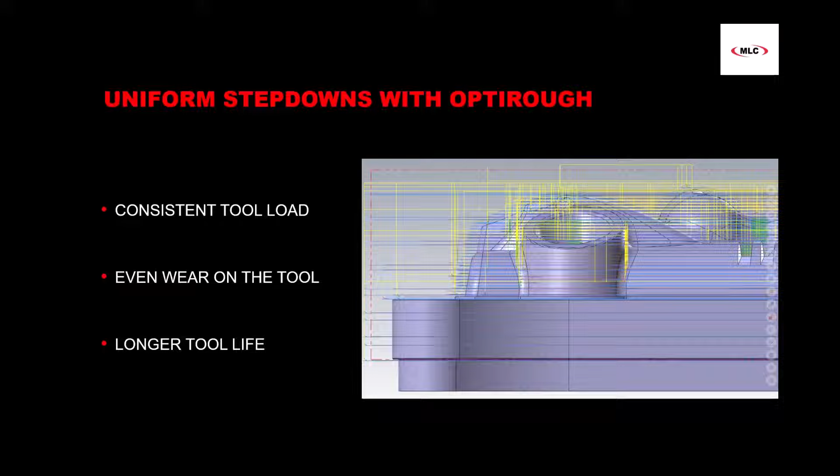So number 1 is uniform step downs, and that's pertaining to the Optirough toolpath. If you've used Optirough in the past, it's a great toolpath. It's taking the dynamic toolpathing that dynamic milling in 2D uses and kicking it up a notch into a three-dimensional environment, roughing out a lot of material efficiently and effectively with step downs and then incremental step ups, right? How could Optirough get any better? Well, it just did. One of those things you might have had to work around and play with back and forth in your parameters window is those step downs.

So we look at our cut parameters, and for step down amount, I have 125%. That's about 781 thousandths. And that value comes from the top of part. If we look at this model here as an example, that's the top of the part. And that's going to be each individual step down, 1, 2, 3, 4, 5, 6, and so on, and each equals that amount exactly. Not a problem, right? We've calculated how much of the flute length we want to cut with. Problem is when we get to that very last step down, what happens with whatever's left over?

Notice that height is a lot shorter than the previous step downs. That's just the way Mastercam's calculating, from the very top of the material you define to the maximum bottom you're trying to cut, giving you a 781 thousandths step down depth, and then you're left over with whatever. You could be left over with 25 or 50. And when you're looking at toolpaths like this, it'd be hard to tell that you only have a 25 thou cut left over at the very end, right?

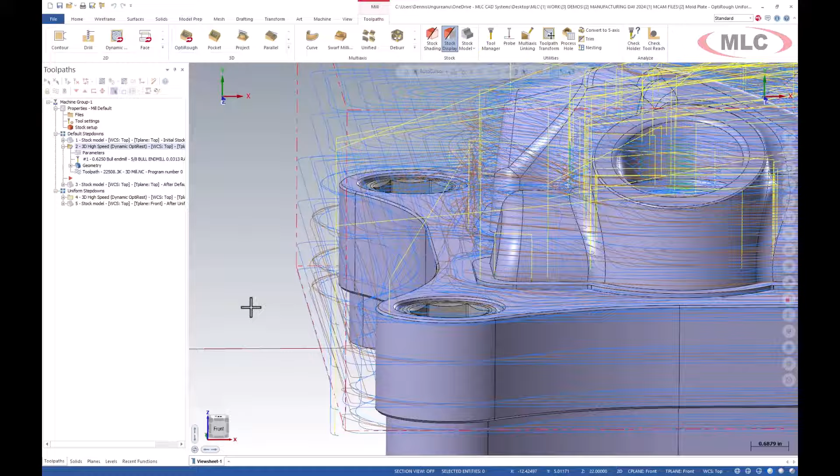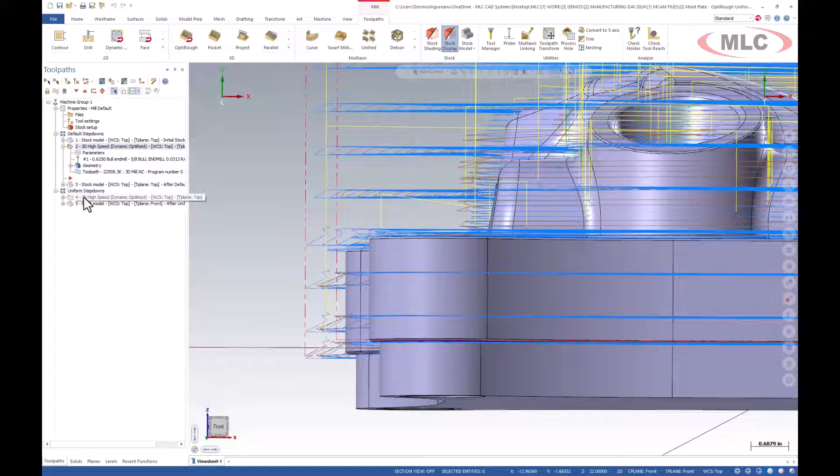You could easily absorb that if you changed that value and spread it among all the other step downs, right? So you go in and maybe do some math and say, well, the number of step downs I have is this much, and the height I've set is this. Okay, I'm going to decrease that a little bit. All right, there you go. But we keep having to go back into parameters to do that. Not anymore. Make it easy. Let's go to the new option here, and it's as simple as a checkbox.

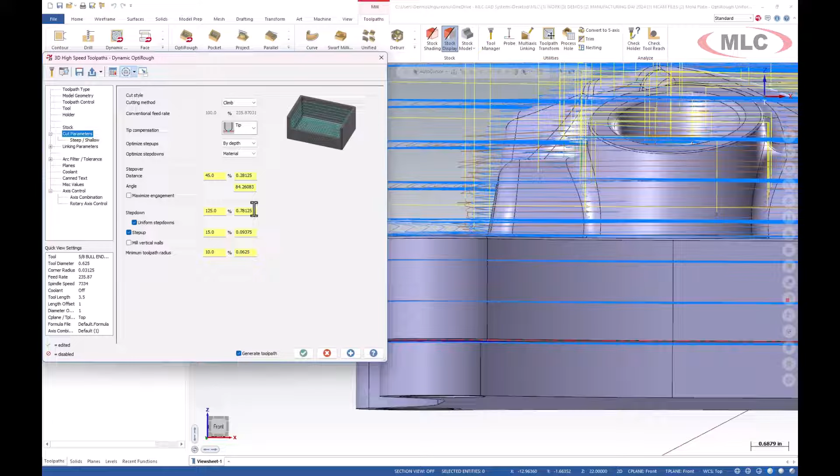So we look at our tool and we determine that 781 is about the max that I want to step down and engage with my flute length on that type of tool, maybe based on material and all that. Well, when you check this box, it essentially takes this amount and turns it into more of a max step down, a max step to cut.

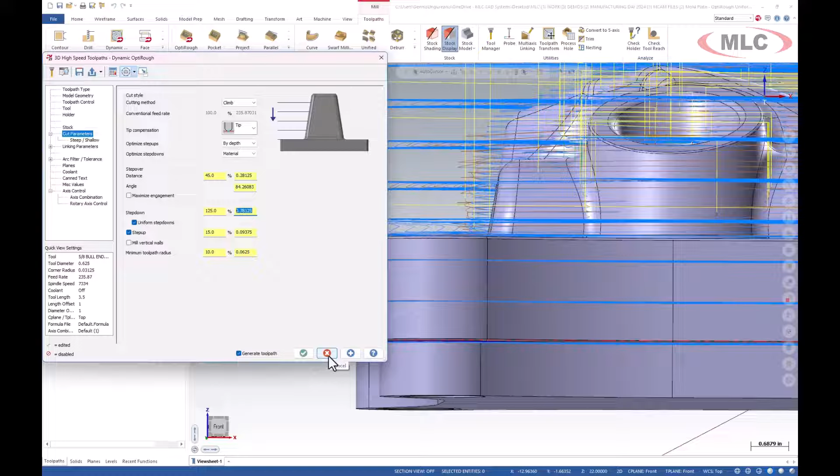And what it'll do is it'll distribute the rest evenly from start to the very maximum bottom. So we'll go back to that same view that we had before and notice that last step down is equal to the previous step downs. Hence the word uniform step downs. Now that amount isn't 781. It's probably maybe 740, 750, could be somewhere in between.

Does it really matter exactly? Well, if it matters, then don't turn it on. But it doesn't matter to me. I'd rather have consistency on all my depths, and that way my flute length is wearing out evenly, and that way my tool is lasting longer.

That way when I'm hearing the hum of that tool running and removing material, because we machine with our ears. That's one guy that taught me that, is that we machine with our ears. And when we hear that same consistent hum, then we know everything is all right.

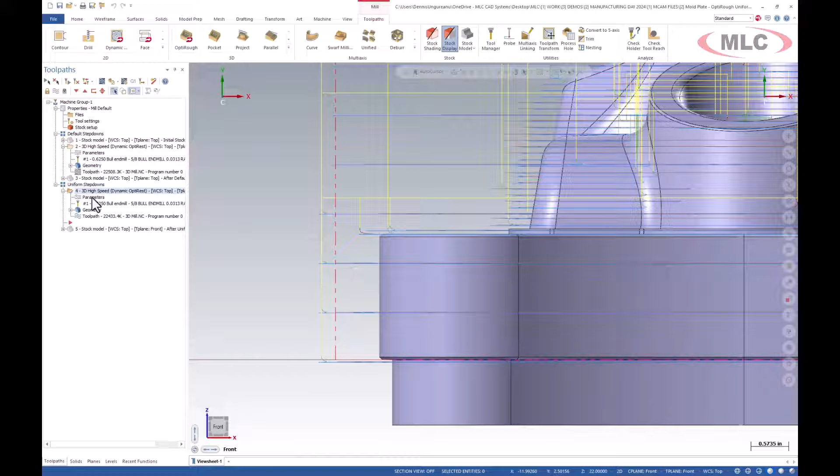So speaking of that last maximum depth, right? We could change that as well, right? And you could mess with your step downs. But what is that maximum depth? What is that final depth at? Well, that drives us into number 2.

And the second thing that I'm going to show you for 2025 is one of the new things that they've improved on, so you can visually recognize what your heights are coming from your top of stock to your final depth and even clearance positions, right?

If you remember in 2024, one of the new things in all the drilling and hole making toolpaths were those colored planes. Now those colored planes were neat because you could quickly identify where your clearance plane is, where your retract plane goes, where your feed plane starts, where your top of stock is set, where your final depth is, and then if you're drilling, where your tip compensation is if you're drilling through the part.

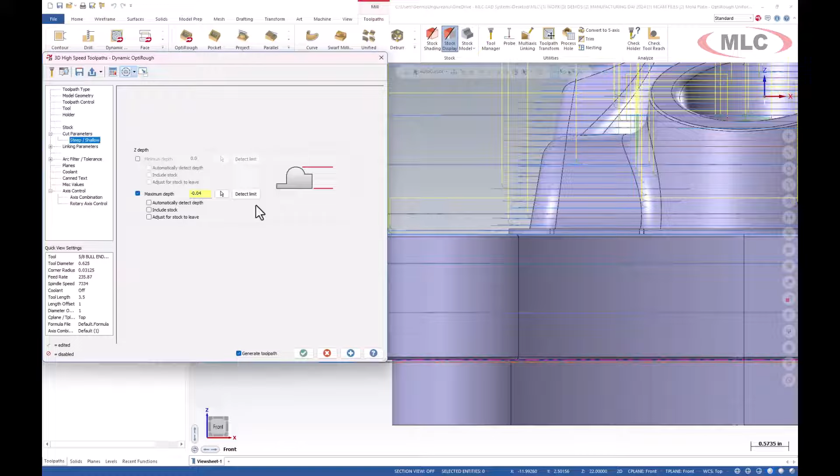So it was quick and easy seeing those little graphical visual planes in different colors. And now they've introduced that into the milling toolpaths. Notice how I rotate my part, and since I'm on this page here, there's my maximum depth. So I'm looking at this value saying 40 thousandths of what?

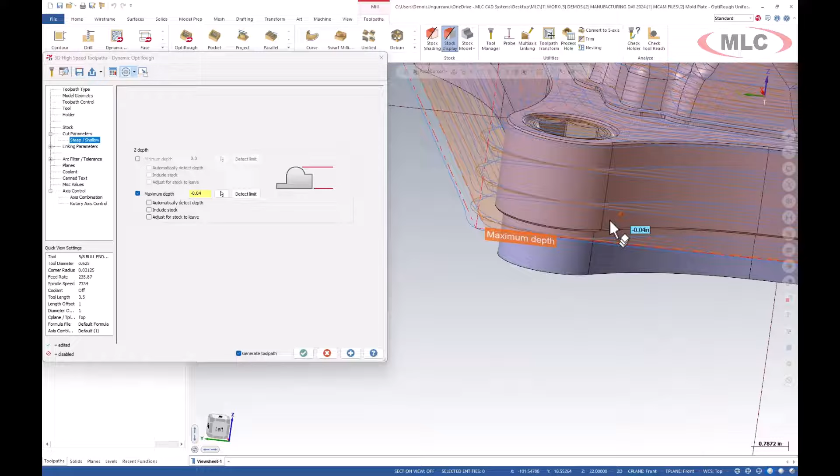Well, I can see -0.04 from the bottom of the part, not the bottom of the fixture. Or this is not the bottom of my part. This is the top of the flat surface that gets bolted onto. So that's one quick visual representation, and we can work with other things, right? Like, for example, this is interactive.

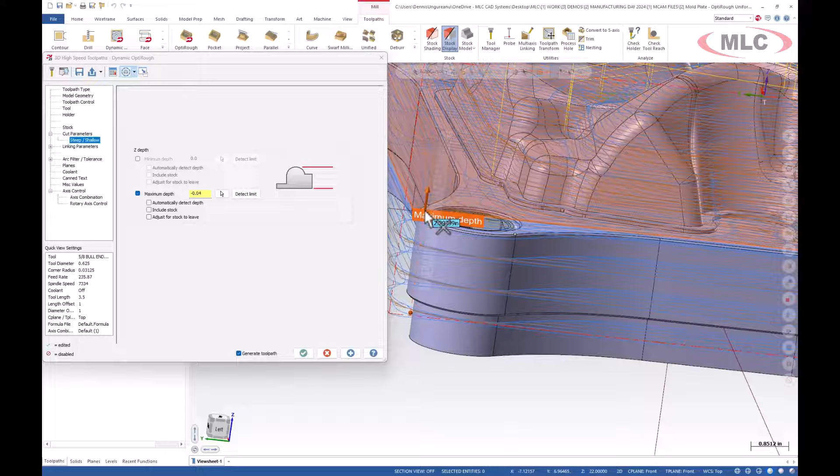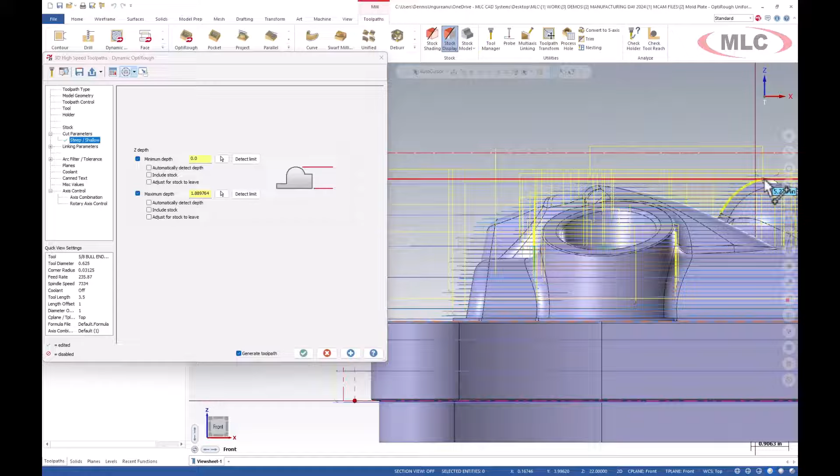I can take this just like in the drilling ones and move it. So if I want my maximum depth to be the top of that surface, I can change that. Changes the value. I can click and it'll snap to certain points. I can go to minimum depth. I can do the same thing. I can see, well, my top of stock is here, and that's going to be right to the top of that surface. I can quickly see the start and finish depths for this part.

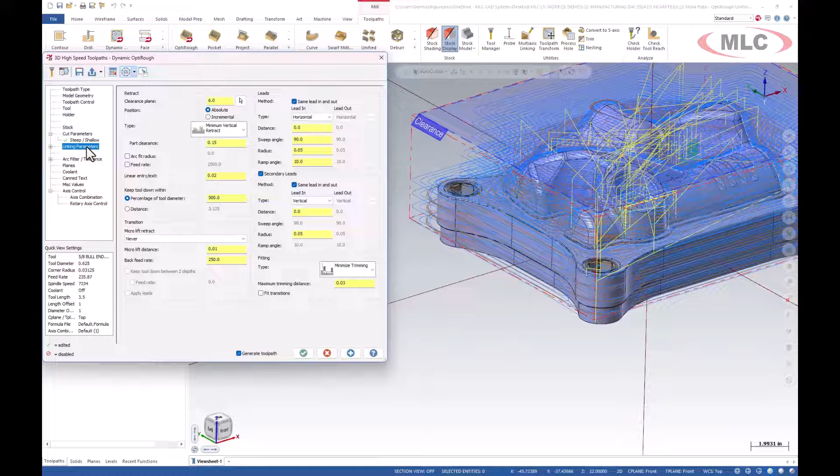And then the most important one, which I think is one of the most important, is your clearance plane, right? That's your rapid. That's where your tool, if anything's going to crash, it's going to crash at that high speed. And we don't want that. That's the worst thing for anything to happen, right? So we can visually see where our clearance plane is set.

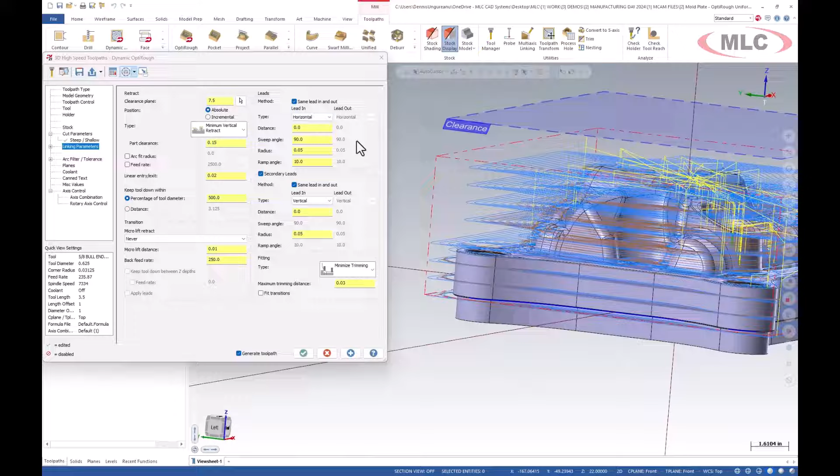And I can bump that up a little bit. If I'm not feeling that confident or comfortable, no problem. I can move it, and I could also just set a number. Let's say we'll go 7.5 inches. Look at that. We got plenty of clearance from our top of stock. And those are the new visual enhancements or graphical visual planes in the milling toolpaths.

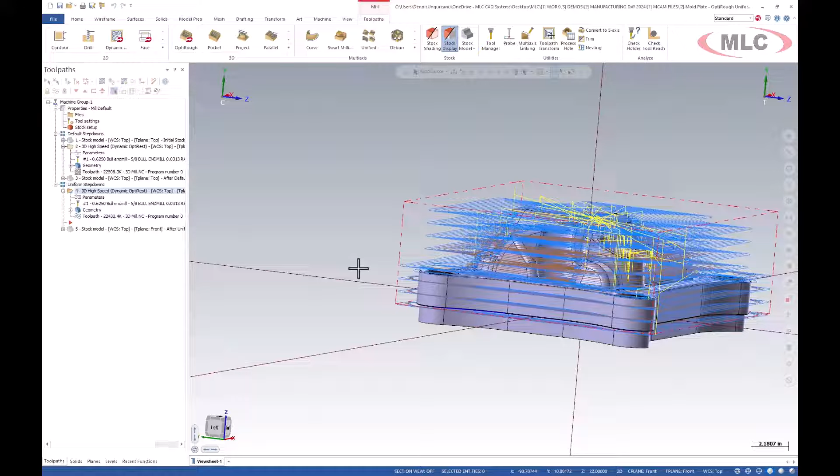And the benefit comes when you're working with other planes or kind of multi-axis, and you're doing the top of your part, front, side of your part, then definitely those planes come in handy to visually see if you've got your clearances set right from wherever your work offset is set, right?

Okay. Number 3 is going to be something that's a little bit combined. All right. And that's going to be a hole recognition improvement to the solid models with auto feature detection, with improved automation on the process holes toolpath.

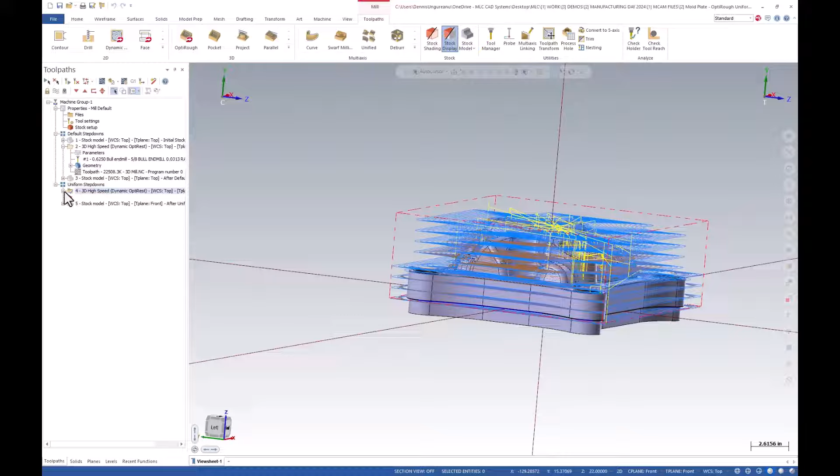If you haven't seen that or heard of that, we'll dive into that as well, which basically gets us faster hole programming by creating and setting up templates of your processes and then just recalling those processes to redo the same holes you do probably thousands and thousands of times per year. So let's jump into Mastercam and take a look at what I'm talking about.

If you're familiar with 2023 and you go back to 2023, what they did is they took this model. Let's say they added a feature called find holes. So under model prep, they added this feature called find holes, right? And you could bring in a model like this that's got all these different solid features, like a counter bore for an M12 socket head bolt with a 1/2 inch through hole.

But what height is that counter bore? What diameter is that counter bore? What else? What other holes are there? What are those sizes? Right? So you could say find holes, and it will find all those sizes out for you. It'll figure it out.

A lot of times with these models, when they're brought in as an STP or parasolid, they won't have that feature history of how it was built. So whatever CAD system you're using, a lot of times it just comes in as a solid body, right? And it doesn't know that this hole is this size or counterbore and all that.

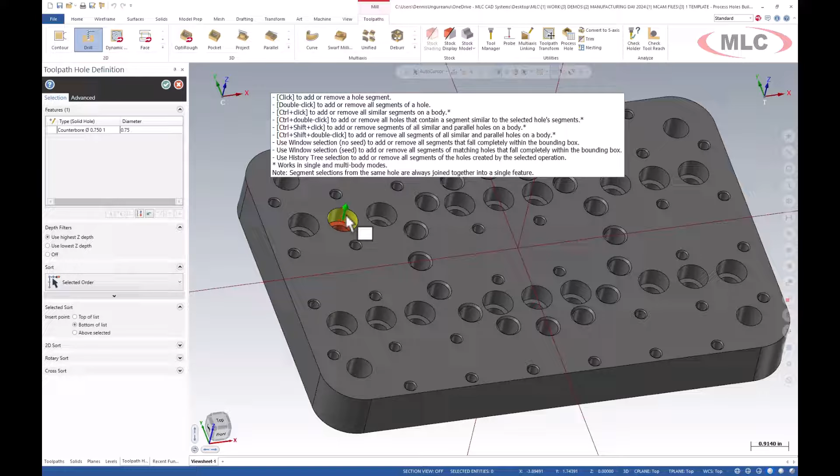Now you can just select any type of hole here, and notice that it'll extract that information. And when I go to my hole segments, it's pulled that information. Now it's all automatic, right? It's part of that auto feature recognition with models that don't have that history built in.

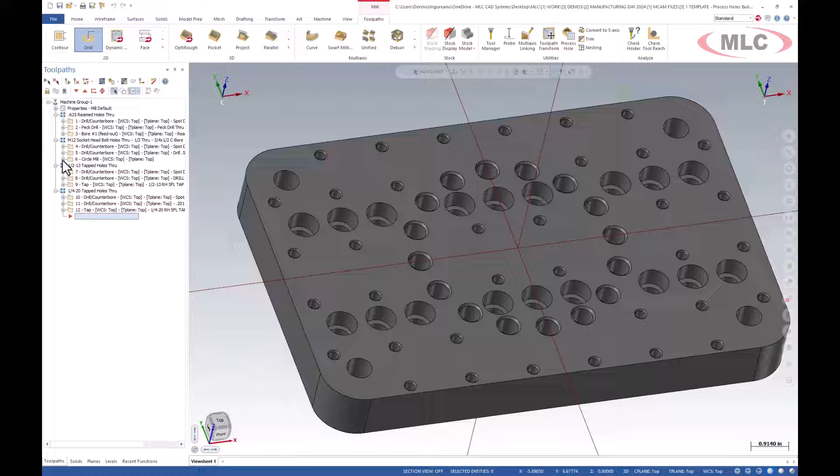So speaking of these toolpaths, I had to do 12 toolpaths for 4 different types of holes. Now, if I have another plate and my boss says, well, you got another plate to do here, it's got a little bit different pattern and it's got the same holes or whatever. Well, I got to go back and reprogram all those 12 toolpaths. Now, I ain't going to do that. I don't know about you, but I'm not going to go back and reprogram those. Not the way I did the first time.

What I'm going to do is export all my toolpaths, import all my toolpaths, and retouch all my geometry. And then you got to go to all your depths and check your depths and make sure those are good. If that's your way of doing it, or you've created a little more of a shortcut to do that, that's great. That saves you from spending, let's say it took me an hour to an hour and a half the first time around, to about 30 minutes.

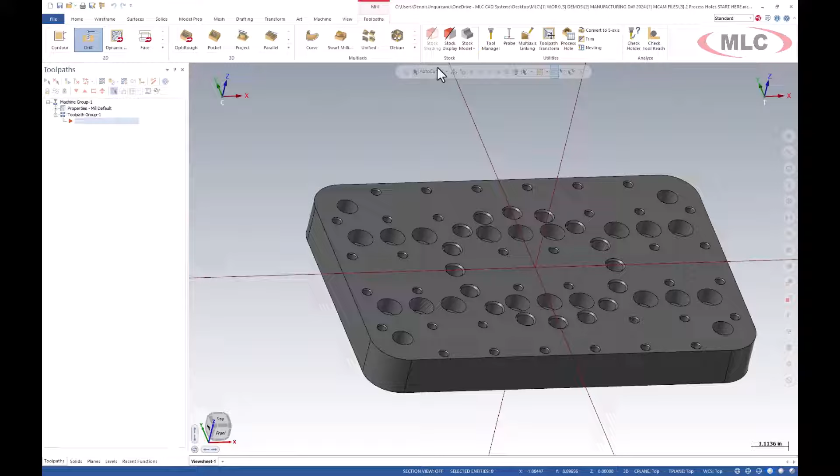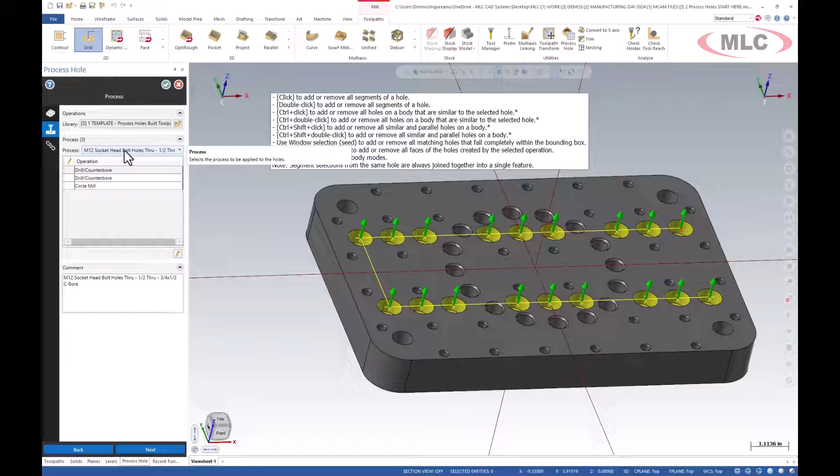Not with Process Hole. If I've created that process and I saved that template file and named it, right? I can now select this counter bore, and I'll select all those holes because I'm holding Control Shift, and just pick out that template file. And what it does is, notice that grouped name that I was telling you about. Well, it figured out based on the geometry that that's my M12 socket head bolt process. And I hit OK. I just finished programming all those holes.

And I can just continue until I'm done with my entire part and reprogrammed it all in a matter of seconds. 30 seconds, if that. It's that fast. And it still gives us the flexibility of changing things around. Because you might say, well, Dennis, I want to change my half 13 process because I don't have that tool, or I want to use a roll form tap instead, or I want a thread mill. That's fine. No problem. We can change things up.

Just highlight all your processes, right click, and say explode process hole. And it splits up all those 12 toolpaths into individual toolpaths like you had originally in your template. I can right click and collapse, and there's all my 12 toolpaths. We can take it another step further and right click and say, let's sort by tool. Now we've sorted by tool, and we created a more optimized and efficient program, not having to do multiple tool changes back and forth, right?

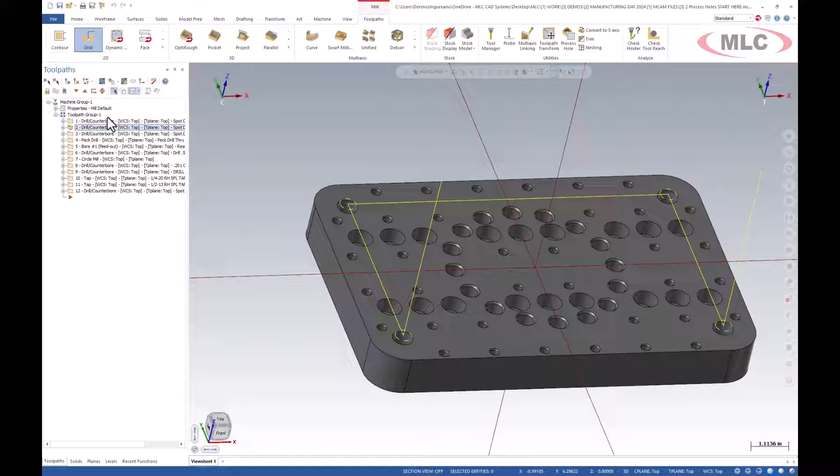And I can go back and change my spot drill. I can select whatever changes I decided to make on the fly. I can go back and change those tools, which would probably be a roll tap size and your drill size for that roll tap, right? The powerful automation of Process Hole will save you tons of time and money, and it'll save you from repeating these processes back and forth. But you gotta have that prep work, right?

Just like the chef in the kitchen doesn't show up at 5 o'clock right when dinner opens and start prepping those ingredients, right? He shows up hours in advance, probably early in the morning, to shop for fresh ingredients and then go back into the kitchen hours before to prep them for dinner time. So that's what we're doing here. You got to prep by creating those templates, and you don't have to use a part. You could use any model as long as your geometry is identical in size and type for what you typically do. So that's pretty neat. I think those are very nice time-saving improvements to 2025. I'm super excited about that one.

And number 4 is probably something you've asked for many times, and you're finally getting it in 2025, which is to create a finish toolpath within 2D dynamic milling and area milling as well. Now you might ask, why would I want to do that? Well, whether you're familiar with dynamic milling or not, if you use it, you get these little vertical lines along the wall. And it's not always the best finish, right? You machine this part with a really nice finish, and then you get these little vertical scallops all along the wall. It's just because of that dynamic motion with that arc entry and exit.

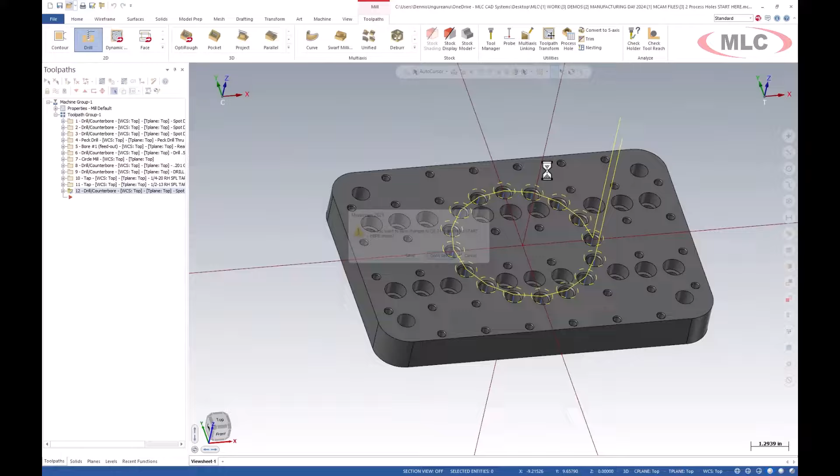There's one guy who called me about 2-3 months ago, and he goes, "Hey Dennis, I'm using that dynamic toolpath, and is there a way to go back and rerun the walls? Because it leaves these little vertical lines along it. It doesn't look that great." And I said, "Well, sir, if you would have called me about 2 to 3 months later, the answer would be yes. But at this time, the answer is no." That's because in 2024 they didn't have it, but now in 2025 they do.

So he was also coming back to me and saying, man, I'm just trying to find a lazy way of doing it, to be honest. And I'm like, hey, you know what? I get it. We're always trying to find the lazy ways to do things with Mastercam, right? We're always trying to find less clicks and ways to go through less dialog boxes and just get straight to the outcome that we want quicker and faster, right? Being more efficient. So I totally get it. We can all be lazy in that aspect and benefit from it.

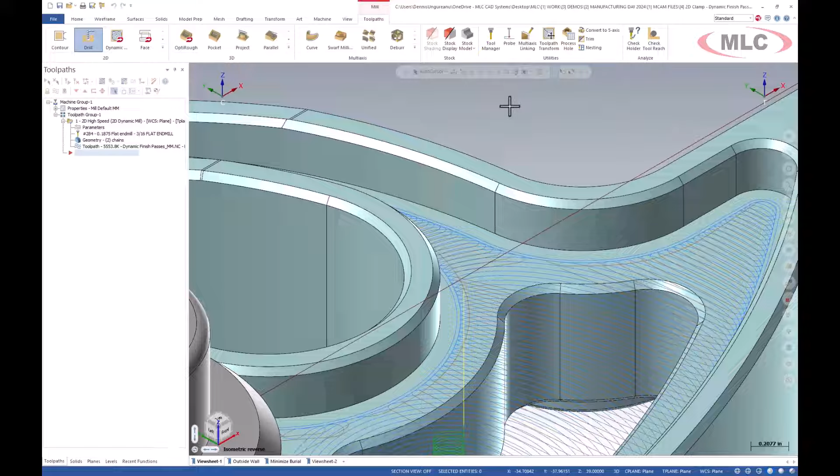So let's look at the parameters here. One thing that we're going to look at is the cut parameters, and we're going to see if anything changed on this page. Can you guys guess what changes are on this page? Anybody? All right. That's a trick question, sort of. Nothing changed as far as the values and the parameters you have, except the values that you're going to enter. You're not going to leave stock anymore if you're going to finish with this toolpath, right? So, sorry about that, guys. I know it's a little dirty trick coming from me, but that's all right, because this one you're going to be happy with. Notice we got the finish passes here.

Okay, we click on finish passes, and now that stock to leave amount along the wall gets entered here, because we're going to leave that spacing amount. Of course, make sure that's enabled, because if not, it'll be grayed out. We got a number of passes that we can use, and spacing amount that we'll leave before the finish pass, and spring passes, and feed rate overrides, and spindle speed overrides. We have the option to machine finish passes at the final depth if you're taking multiple depth cuts. We got a minimize burial option, which we'll come back to. And a cutting method, climb or conventional, and our typical compensation types.

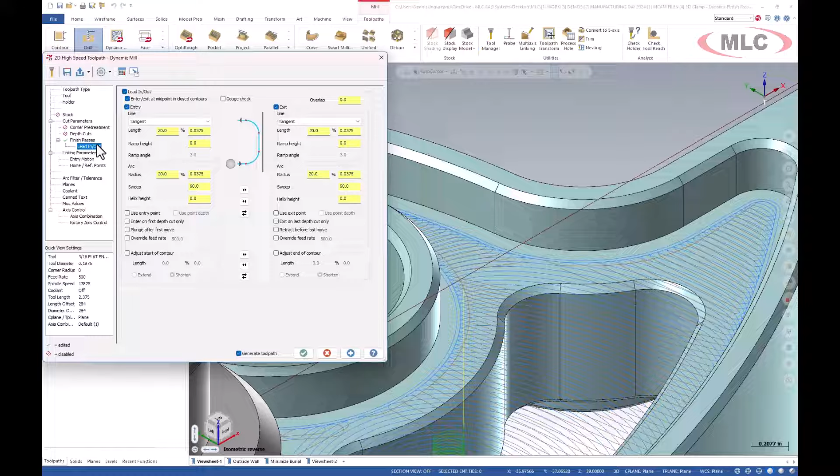Keep in mind, what's also nice is that with contour, you have to worry about that green arrow. Where's it at? Which direction is it going? So if you're trying to climb cut, make sure you got your comp on the correct side of your chain, right? You don't have to worry about that here. If you're going to finish, just hit climb and it'll figure it out automatically on its own. Below the finish passes, you have a little expansion there, and that's your typical lead in, lead out options. Nothing different here. These just pertain to your finish pass only. It has nothing to do with your roughing.

But let's take a look real quick at what this looks like. So I like this part. Looks like it's roughing and finishing everything. Very nice. Coming around that boss. All that material's removed. Those pockets are all cleaned up. And I want to see if I can speed this up, right? I want to be more efficient, right?

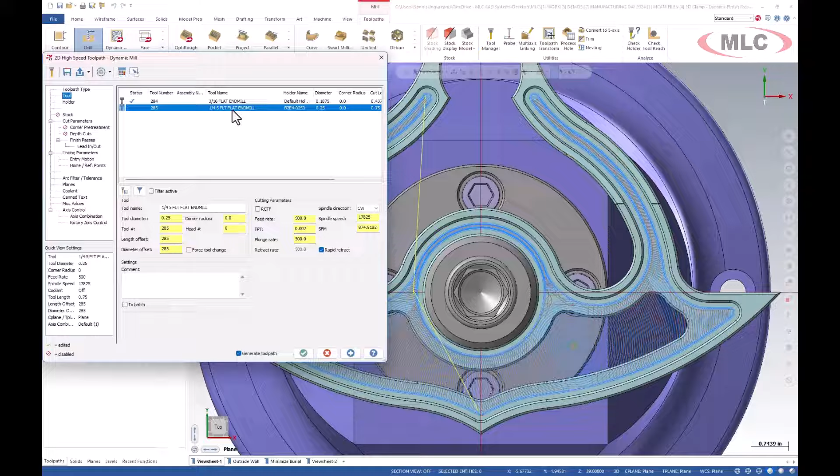Faster. So I'm going to go to the tool and I'll say, well, I got a 3/16 flat end mill is what I'm using, but I got a 1/4 inch 5 flute flat end mill that I could use. That gives me a little bit larger step overs. Okay, I'm good with that. Let's try that. We'll hit OK. We'll let this thing regenerate, and then we'll come back and see how that looks. Does anybody see anything different? I see something different. I noticed that there's a couple lines going around this area, but my dynamic roughing stops right here and comes back.

Oh, that's not that good, but that's all right. Mastercam's got you covered, okay, because you don't have to worry about that. That's where that minimize burial option comes in play. Mastercam has defaulted that option on so this can't occur unless you turn it off specifically. Anytime you use that toolpath, it'll always be by default turned on.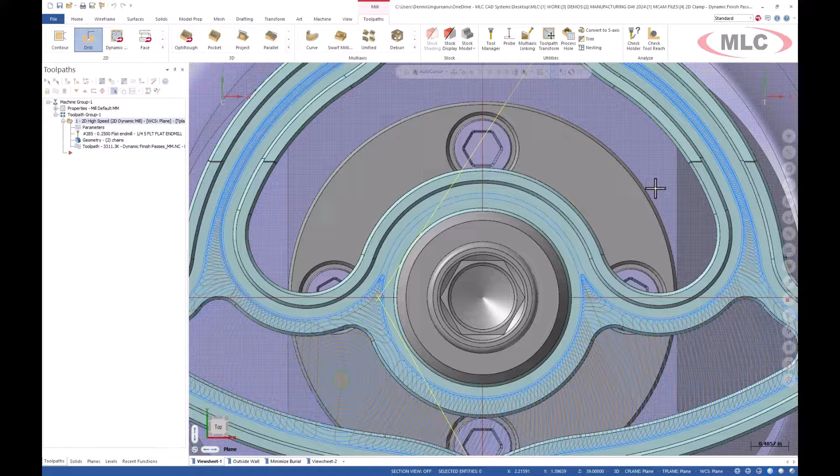What's happening here is that you basically have unroughed material in this portion, and you have two finish passes, and at least your very first finish pass going in full width of that tool. That's full engagement. Now if you're running high feeds and speeds using that dynamic motion, and your finish pass is probably running pretty similar high feeds and speeds because it's only removing 20 thou, well now when it comes into that material that's going to be full width, that's kind of an unsafe condition. We could have our tool get clogged up and overheat. We could have the tool chip or break, and we could possibly get that material or the part to shift on us, and that's not very good, right?

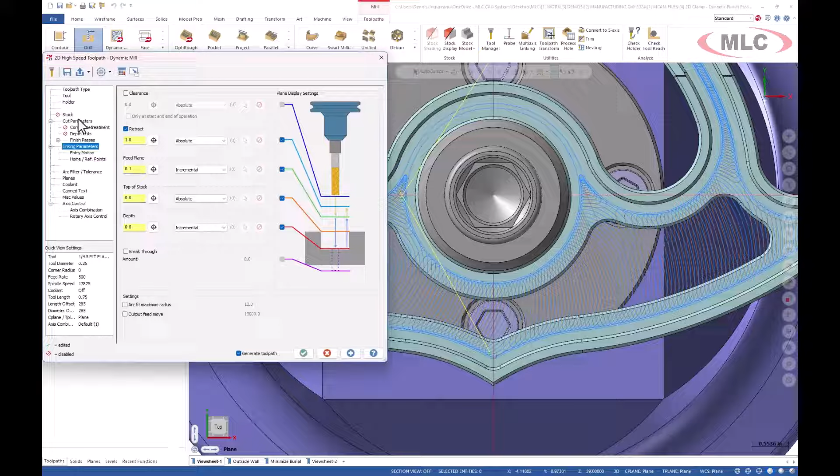So Mastercam has thought of that and included in the finish pass that option, okay? So we'll turn that on and regenerate, and notice now when I zoom in, this area has no more finish passes. We can take a look at the finish pass, comes up around where it gets roughed, changes direction, and continues finishing the other sides of the wall.

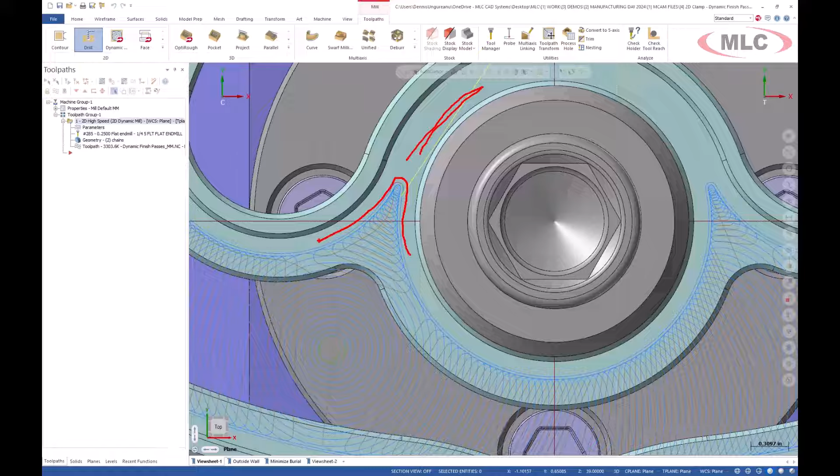Okay, so worst case scenario here, we have a part that's got unremoved material. It's not finished yet, and we could either create another toolpath for that or just revert back to that smaller tool to be able to rough and finish all areas of that pocket. So we could simply catch that and verify and see that that material hasn't been removed.

But another thing to consider is that the safety of this toolpath is because the finished toolpath and finishing chain and toolpath is able to see what the dynamic roughing left over, right? And what the dynamic toolpath is doing.

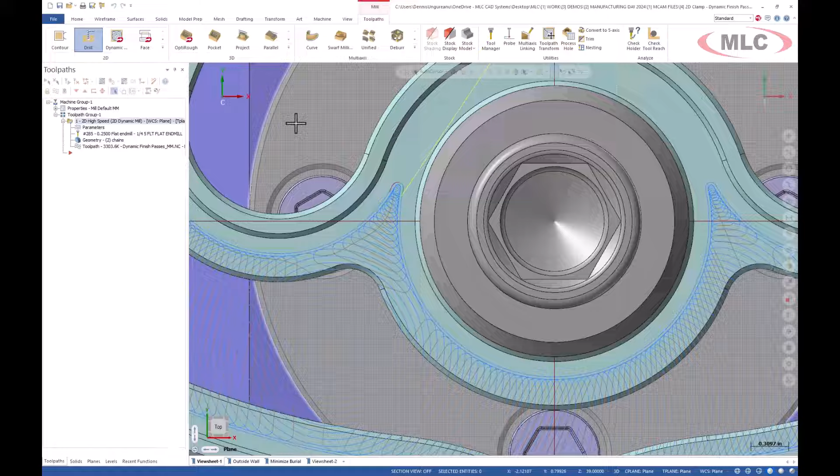Now back in 2024, when you had the two toolpaths separated, the contour would not be able to distinguish what the dynamic toolpath did or didn't. And essentially you could have still run into that same situation unknowingly if you didn't run your verify or if you didn't visually check for that, right? So that's a benefit here, is that it's automatically saving you from potential hazards like that.

All right, well, I know I've asked for that before, and now we finally got it. So I hope everyone's happy with getting that finish option there in the dynamic milling and area milling as well.

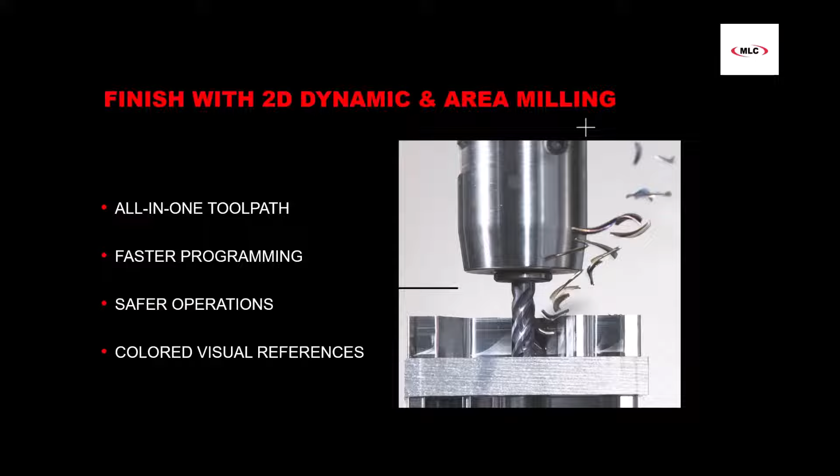So the fifth and final 2025 feature that I'm going to be showing you is 3-axis Deburr. Okay, now this is an add-on, an add-in that you have to get for your 2D mill, 3D mill, or router licenses. Okay, if you have a multi-axis license, then you already have the Deburr toolpath. So this one is pretty much irrelevant to you at this time because you have the latest and greatest license that gives you the option for Deburr and gives you option for even 5-axis and other capabilities to break the edges of a part.

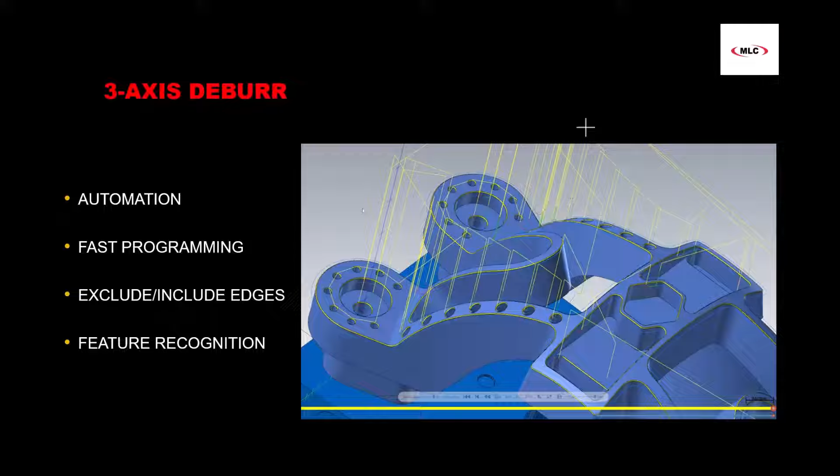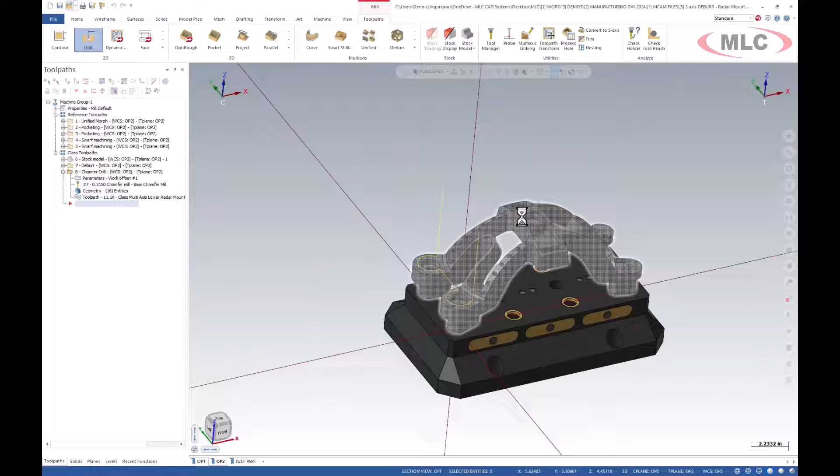So if you don't have that multi-axis level license, which not everybody needs it right away, and not everybody can afford that level of license or want to spend that much money for just one single toolpath, well now you can have the benefits of the automatic feature recognition of your part geometry and the creation of automatic edge breaking toolpaths for your part while it's in the machine. So it's taking this Deburr toolpath, but it locks it in a 3-axis environment because you don't need it for multi-axis anyways, or else you would have a multi-axis license.

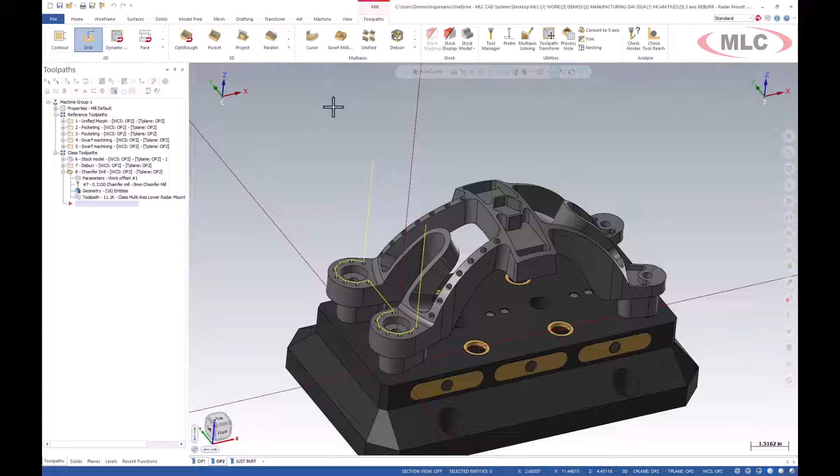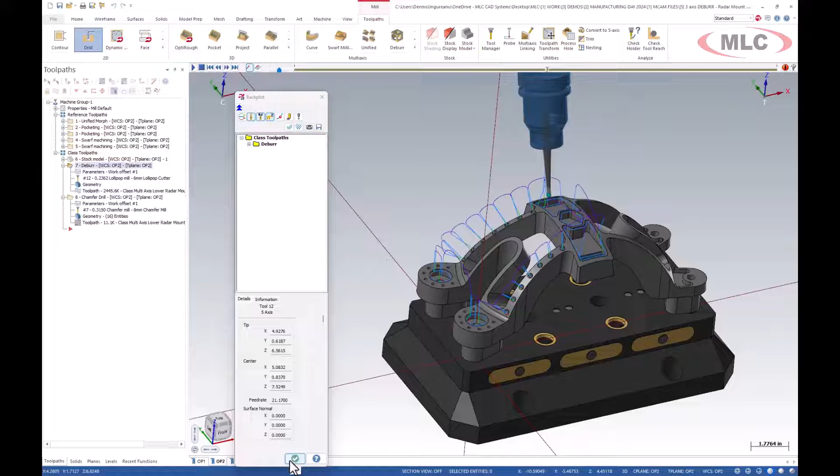But 2D, 3D milling licenses and router licenses are all in a 3-axis environment anyways. So typically you would see something like this. This would be like a 5-axis Deburr toolpath motion. I usually will run kind of a quick back plot to show you what I'm talking about. But that's okay. We don't need to have that 5-axis capability to use the new 3-axis Deburr for even a part like this.

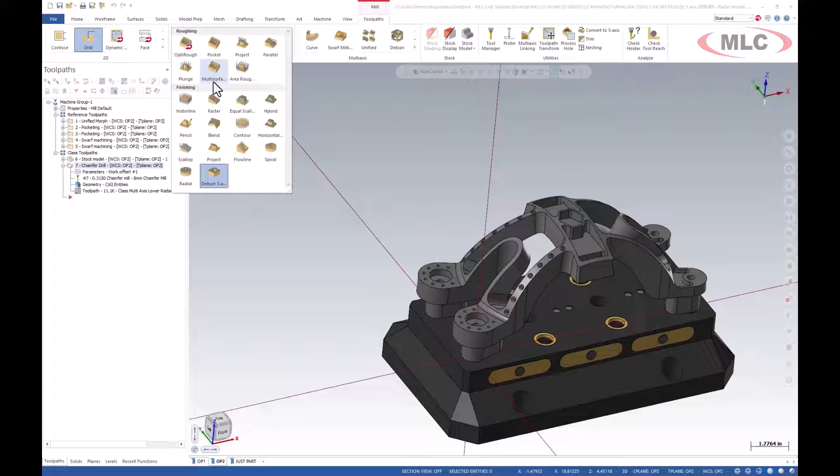So I'm going to delete that toolpath, and we're going to go find out where that 3-axis Deburr toolpath is hidden. Again, if you have it as an add-in, you'll have it available in your 3D group for Deburr 3-axis. And I'll show you how quick this is. You probably won't believe me. I'll hit that lollipop cutter, and maybe instead of hitting OK, we'll go back and we'll hit a cut pattern to actually select the material and the part, and then just select their entire part. Now I can hit the green check mark, and that's it. It's done.

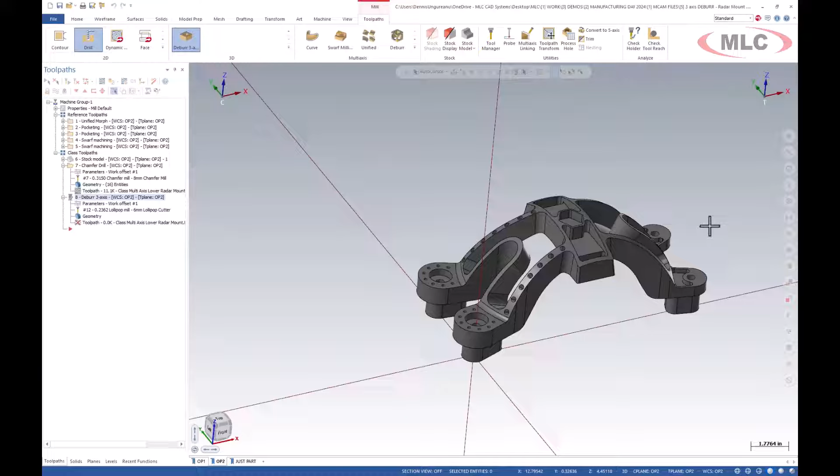Once it's regenerated, it's going to spit out the toolpath, and it's complete. It's that quick and easy. I just deburred the entire part.

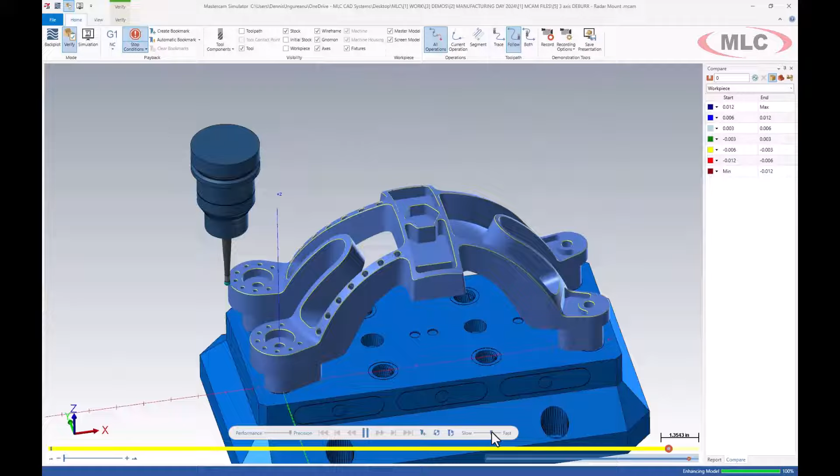So I can run my verify. Before I run verify, it might help if I actually select my stock model here. I'll run my stock model and hit verify again, then just hit play once it appears, and go ahead and check all my tool motion and check all my edges and make sure they've all been addressed and deburred. Looks good to me. The other benefit of this toolpath is doing things like this, where kind of like the model chamfer toolpath does, it's able to know when to stop so it doesn't collide with the wall.

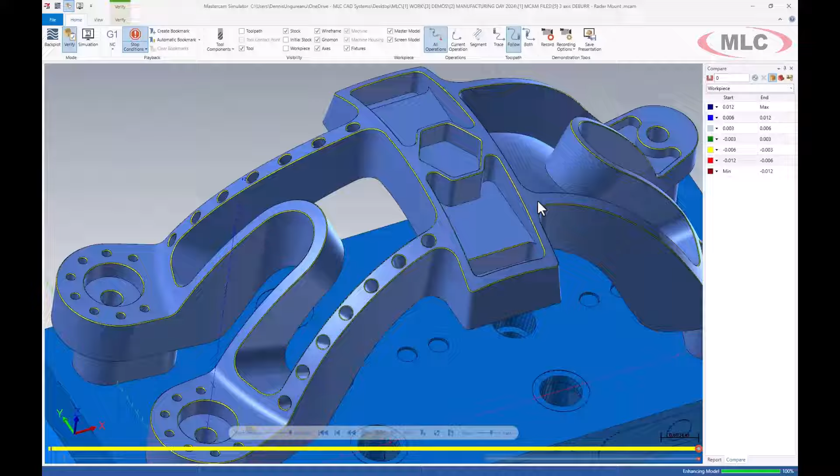So, great toolpath, that quick on being able to break all the edges. But I'm going to slow it down a little bit for you, and we'll go back and take a look on how I did that. I'll delete it so you don't say I've got tricks up my sleeve. No tricks, I actually even went too fast, faster than myself, and hit OK before I even selected the geometry.

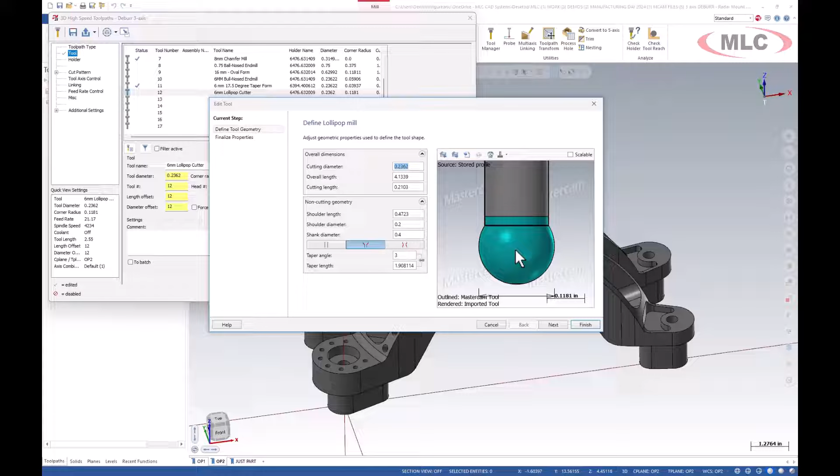So first things first, right, you got to pick a tool. This works with 3 different tools. It's either a full radius ball end mill or a lollipop cutter, such as this one, which is nice because if you use a lollipop cutter, this toolpath will actually go through a hole and undercut and break the edge from the bottom side of the hole as well. So it saves you from having to flip the part in certain situations. Go ahead and I'll select that one.

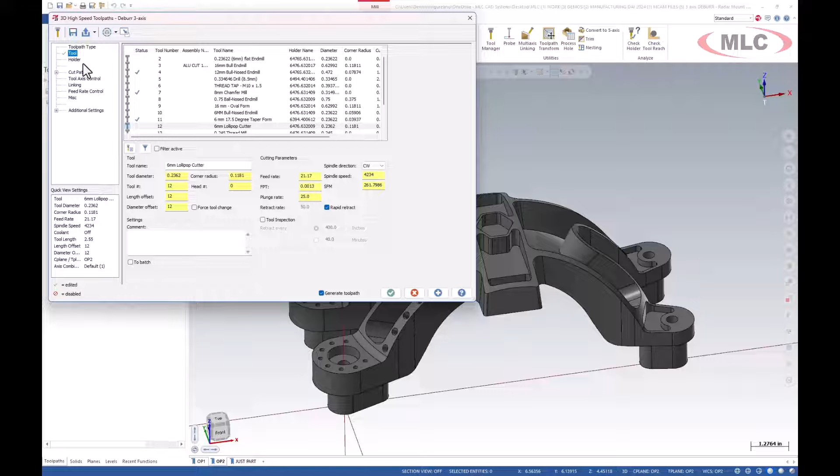The other type of tool you can use is a tapered end mill, but it has to be a full radius tip, so a full radius ball tapered end mill. Those 3 types of tools will work with this toolpath. And like I said, I just went to cut pattern, went to my machining geometries, and selected my part.

All I did was unhide, or hide I should say, my fixture so it's not in the way when I select my part. And now it's looking from the top down and looking at where all the sharp edges are and what needs to be broken. This is the amount that it's going to break, 20 thousandths. It's going to maintain a width or a depth, however you want.

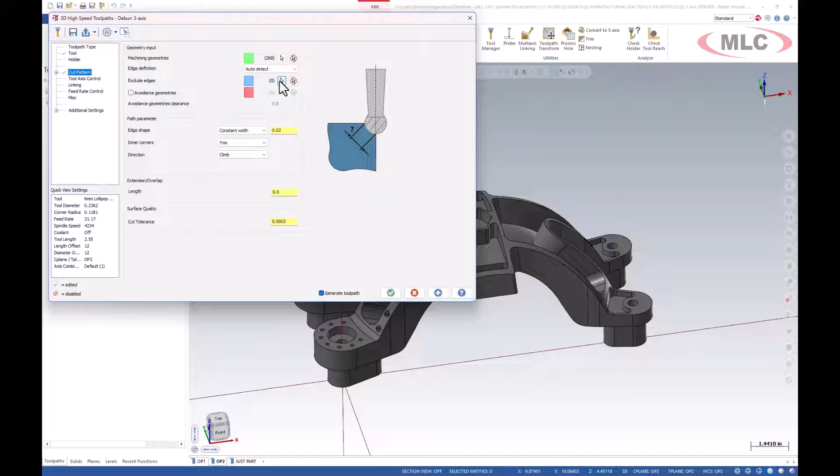And if you want to exclude certain edges, let's say you do have sharp edges, or edges you want to break a larger or smaller amount, you can exclude them. Or you can also add, to define specific edges. I want to just auto detect the entire part. My print says break all edges, 10 to 40 thou, so I went with 20, somewhere in the middle there. Still leaves me a little room for more if I need to.

You also have the overlap option, just like in a closed contour. You can overlap those closed chains. And if you do have an open chain, it'll extend the entry and the exit of that chain. That's about it. You can trim some corners, or relieve the corners. And you have your climb conventional.

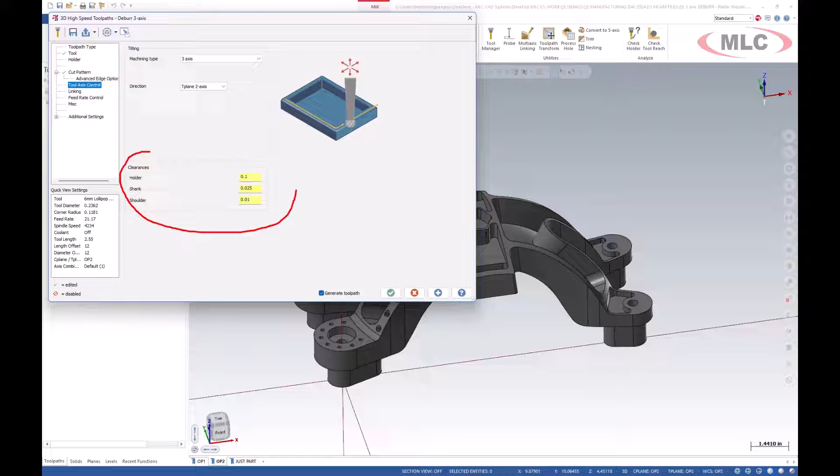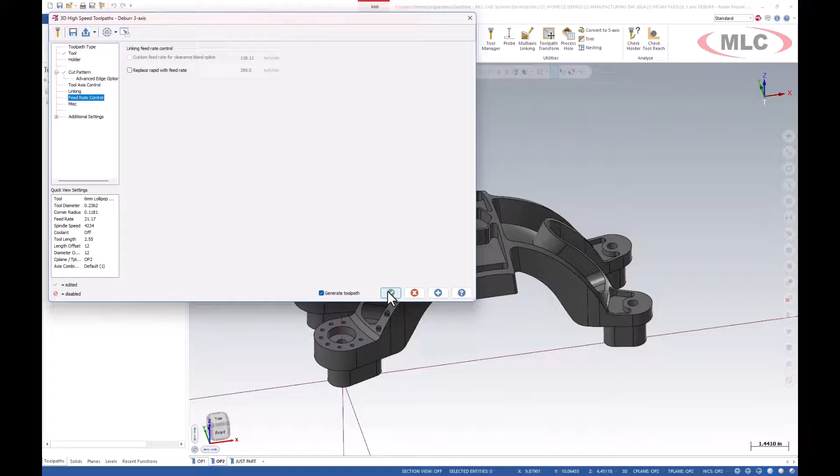For tool axis control, the only thing you need to worry about is your clearances. That's your holder, your shank, and shoulder. It'll maintain those clearances. Linking parameters is your entry, exit moves. And then you do have the option to replace rapid with feed rates instead. Hit OK, and there's your toolpaths.

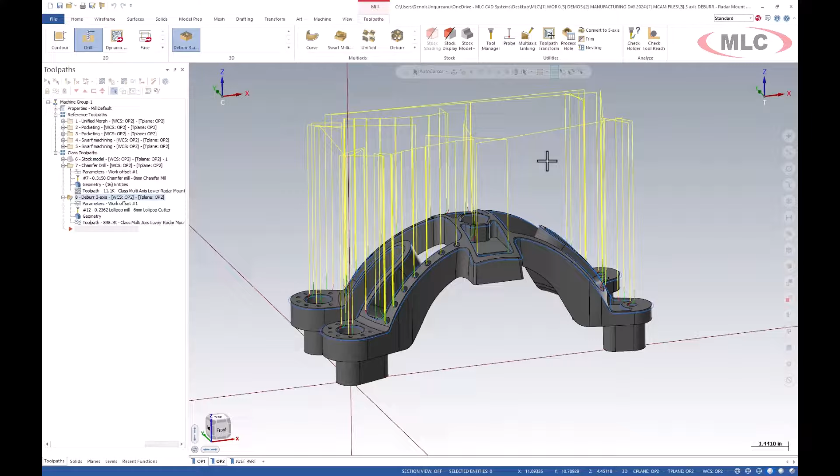So you can come back here if you wanted to shorten up your clearances, and optimize this a little bit. Otherwise, if this is just the one part, send this to the machine, send it to your operator, hit the go button. 10 minutes later, you got a completed part, send it to quality control, and you're done. You don't have to sit there by hand and manually try to break the edges, trying to get consistent chamfers or edge breaks around your holes and your pockets and all that. And hopefully you don't miss one, right? So that's the benefit of keeping it all in the machine and working with your solid geometry that you've already started and programmed off of anyways, right?

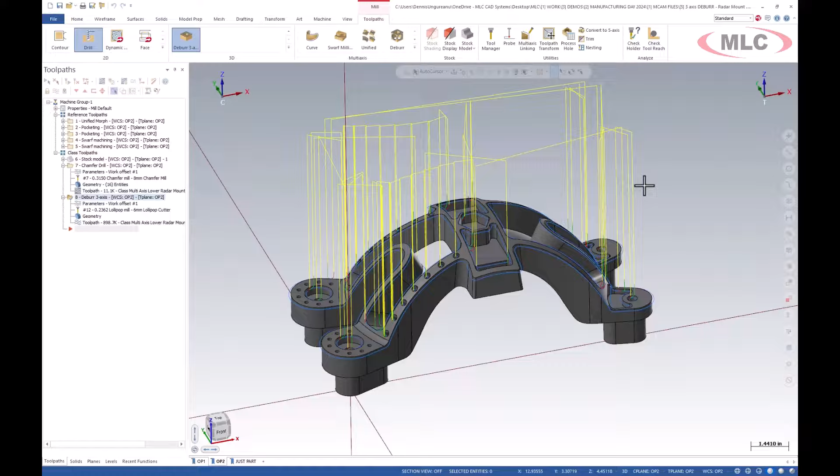So those are the 5 things that I wanted to show you in Mastercam 2025. There are more things that have come out, so please take a look at some of the other videos we will be releasing with some of the other new things in 2025. I hope you enjoyed seeing some of the new things and it was beneficial to you, and you can take that and improve some of your processes back at your work and your job.